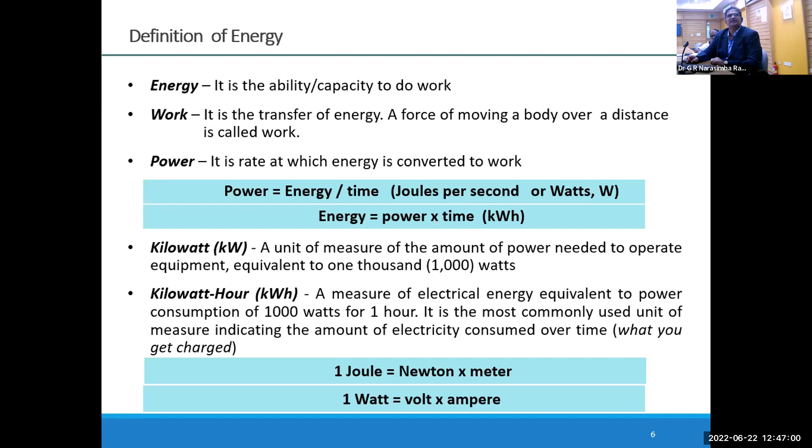And we have forms of energy, where different forms of energy are consumed in daily life. If we categorize them, there is physical energy for doing the work, and thermal energy, which is the heat energy, where fossil fuels are converted to get heat. And we have electrical energy, which is mainly for running the equipment, a very efficient form of energy when it is used.

So physical energy is mainly for doing the daily routine works and physical movement of objects, whereas thermal energy is mainly used for driving vehicles, converting fossil fuels into moving cars and vehicles, and even cooking and water heating, these kinds of applications. And the electrical energy, we have lights, fans, air conditioners, running daily appliances. These are the forms.

And we have different forms of energy based on how they are obtained. Chemical energy, which is released from the chemical bonding of components, either fossil fuels or biomass. And electromagnetic waves, which are naturally available waves, which carry the heat from the sun to the masses. And we have mechanical energy, which is stored in tension and compression in materials, where a simple example is stretching a rubber, which will release the energy stored in that form. And we have electrical energy, which is converted from other materials. And we have thermal energy, from geothermal and solar thermal energies as examples. So these are the different forms of energy which everybody knows.

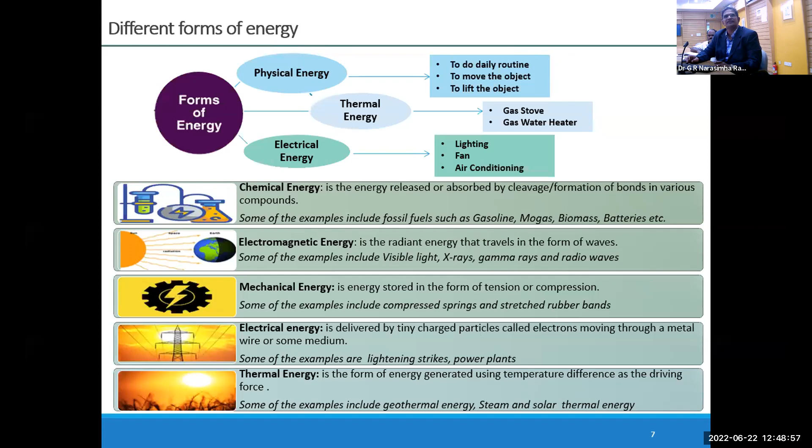Then we have conversion of electrical energy. The main sources of electrical energy are fossil fuels, renewables, geothermal, and even hydro. All forms of energy can be converted into the useful form of electrical energy, which can be transmitted very easily from one place to another, and with the technology we have today, it can be used by the end user in different versions. And the latest one is the EV, electric vehicles, a transportation mode which is considered to be the more efficient and easy way of using electrical energy.

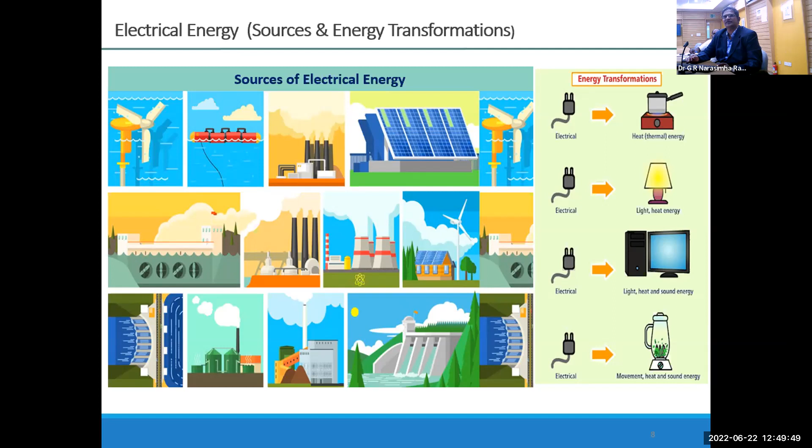So comparing all the forms of energy, electrical energy is a very easy and very efficient way of converting energy to usefulness. So when we look at electrical energy, it will have different components until it reaches the end user. The end user is a home or school or college, whatever you take.

From the generation point, if you are generating the electricity at one particular place as a power plant, either a solar power plant or a thermal power plant, when it is reaching the end user, there are three components of power flowing in the conductors, where the active power is kilowatt, the useful energy.

When beer is poured in a glass or a mug, we can see the active part, but there will be a foam which comes out as a type of inefficiency. It is like a waste, but the foam is a must. Without reactive power, the active power will not come into the picture. So as much as possible, the reactive power should be minimum. Then you can get the best active power in the system. That is nothing but the kilowatt power, the useful energy which we can get.

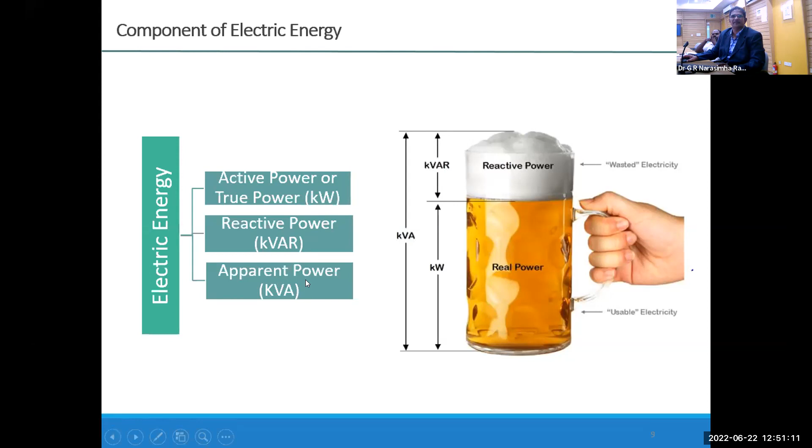At the same time, the combination of both the active power and reactive power is nothing but apparent power, the total power in the system. So when we look at the power rating of the system, the input power and active power for any appliance is used for doing the activity. If you take any product, like a refrigerator or an air conditioner unit, it will have a tag on the product with the rating, the capacity of that equipment, meaning it can draw that much kilowatt of power.

If that equipment has been operated for a period of 1 hour, then we get the energy consumed by that equipment. If it is 1 kilowatt, or 1000 watts, and operated for 1 hour, then it becomes 1 kWh. The 1 kWh of energy consumed by that appliance will be recorded in a meter for the individual equipment, or generally the utility meter at every house, school or college. Our measurement for energy in the electricity bill, or in calculations, should be in kWh: the active power multiplied by the time in hours.

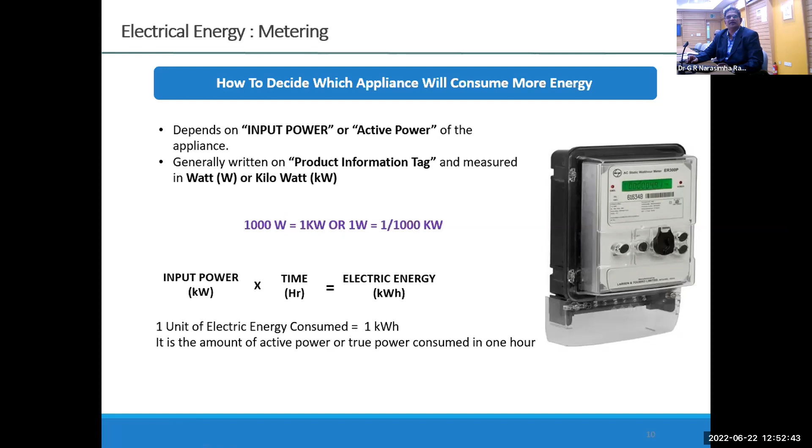Now, what is the difference between energy efficiency and energy conservation? Energy efficiency is using energy to provide a service through any appliance or equipment: how we convert the input power, how much will be the output, and minimizing the loss, which is nothing but high efficiency. Energy conservation is the behavior of people, the type of activity we are doing which consumes less energy.

The basic difference: energy efficiency is an integral part of energy conservation, but energy conservation is a behavioral change. Basically, how our habits are, how we actively do our work, how we choose our appliances and equipment so that they consume less energy, is energy conservation. If you have tube lights in a house or classroom and you turn off the lights when not in use, that is energy conservation, because you actively decided to turn off the lights.

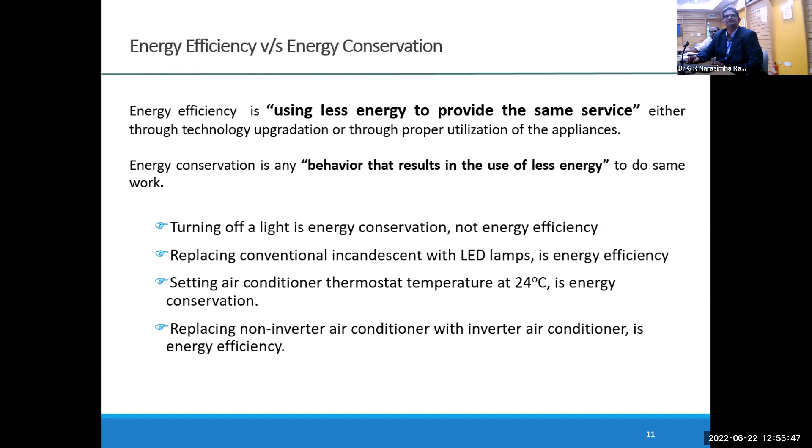The same way, you can see further a few examples where energy efficiency is nothing but technological improvements and advancements in particular products, like high efficiency lamps, LED lamps, and ceiling fans, the latest being available with brushless DC motors, where the savings compared to conventional fans are around 50 to 60%.

And inverter based air conditioning systems, low refrigerant, where high performance air conditioners are available. And in cooking, we have induction technology, where the amount of energy used for cooking any product would be less, but induction technology is an electrical stove. So these are a few technology-wise examples of energy efficiency.

Then we have energy conservation, where the behavior and habits of individuals lead to less energy consumption. Like use of the staircase: even when you have a lift, you are using the staircase for going up and down, that is nothing but energy conservation. And using a bicycle, where human energy is converted for movement from one place to another.

And you have a cooking stove with multiple burners, where you choose the correct size burner for the vessel size, the smaller burner for the smaller vessel. Then you are consuming a smaller amount of LPG gas for cooking. That is energy conservation.

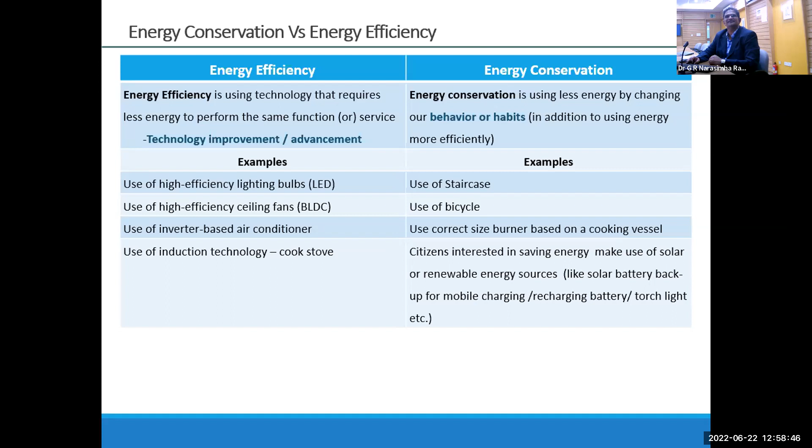So now, in the same tune of energy efficiency and energy conservation, we have different products available in the market. A simple example is the washing machine, where we have front load and top load washing machines. The front load washing machine takes less power and less water, so it is the more efficient one. So you can choose the front load washing machine, which is efficient.

And at the same time, ironing of clothes is something people do every day. If you accumulate all the clothes you have washed for 2 or 3 days or a weekend and iron them at one time, rather than multiple times in small quantities, that is also an energy conservation habit, a behavioral change. So these are simple examples which we come across in our daily life.

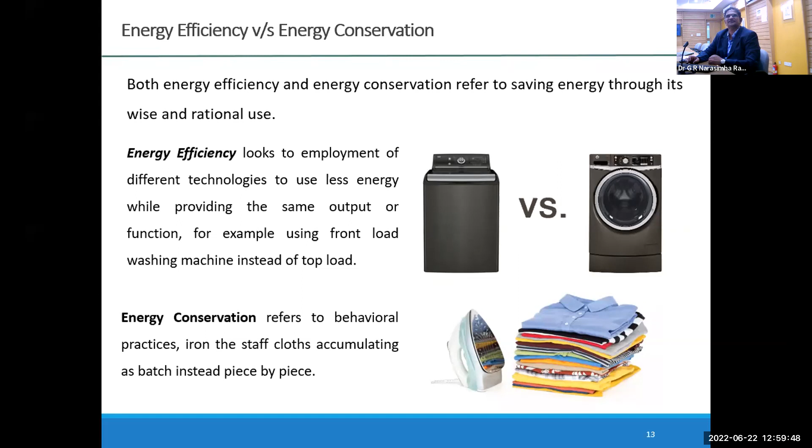So as we have seen, technological intervention, which reduces the amount of energy required for any product or service, is energy efficiency: the same output or service from a smaller amount of energy. And energy conservation is behavioral change, switching off lights and using lower rated power equipment for the same appliance. So as I told, energy efficiency is an integral part of energy conservation.

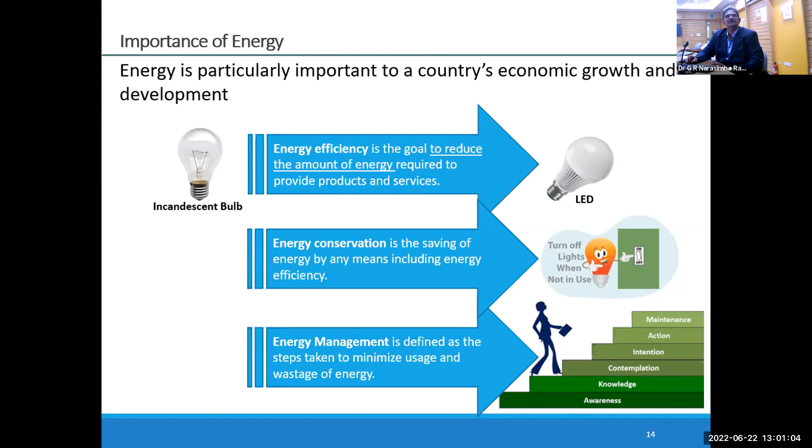Then energy management is a series of steps where you adopt different stages, like maintenance of appliances and equipment at home, the kind of actions we take, and sharing the knowledge we have with other family members and children. All these are part of energy management at each and every level. So these are the three elements: energy management, energy conservation and energy efficiency.

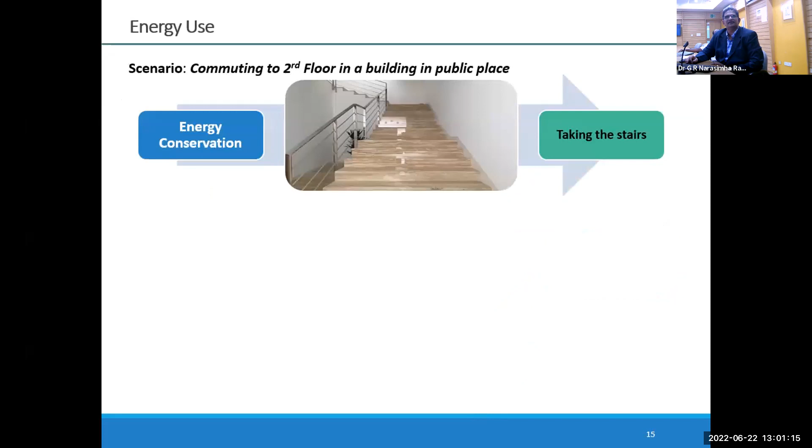Now, another example: if you have a lift and a staircase, as I told, using the staircase is energy conservation. And if, instead of a single person moving in the lift, you wait a minute so that 2 or 3 people, as it has been optimally designed for, use it together, then it is an energy efficient use.

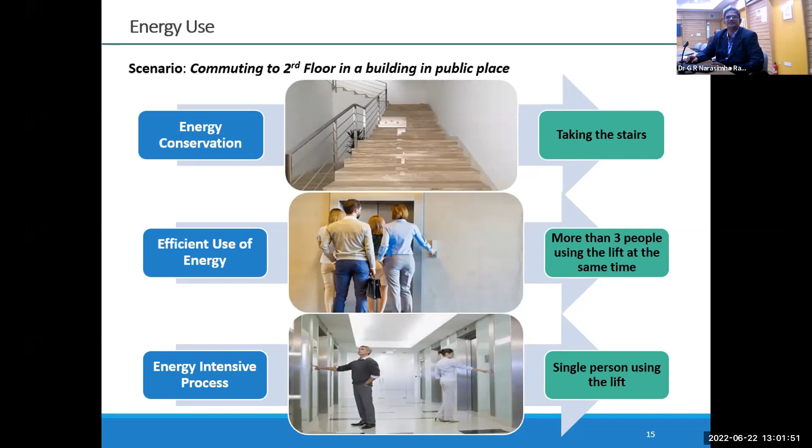Energy intensive means, for instance, if a single person is using a lift for movement, that is an energy intensive process. Same way in transport, if you're using a bicycle for shopping of a small quantity, that is energy conservation.

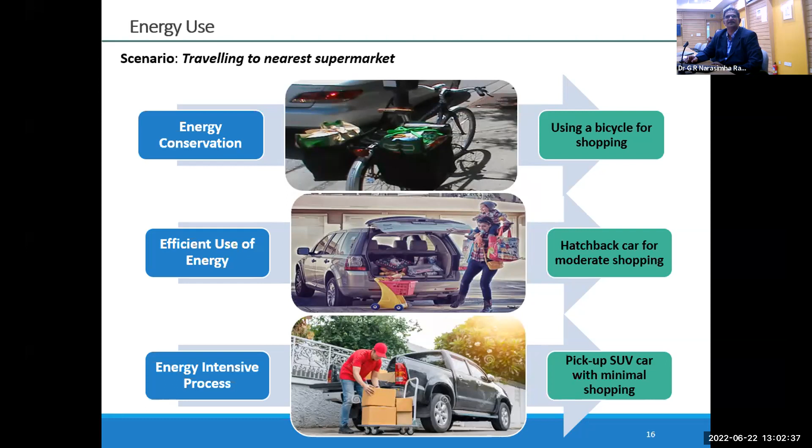So it is based on the availability and the equipment that one can decide whether they want to adopt an efficient method for their activities.

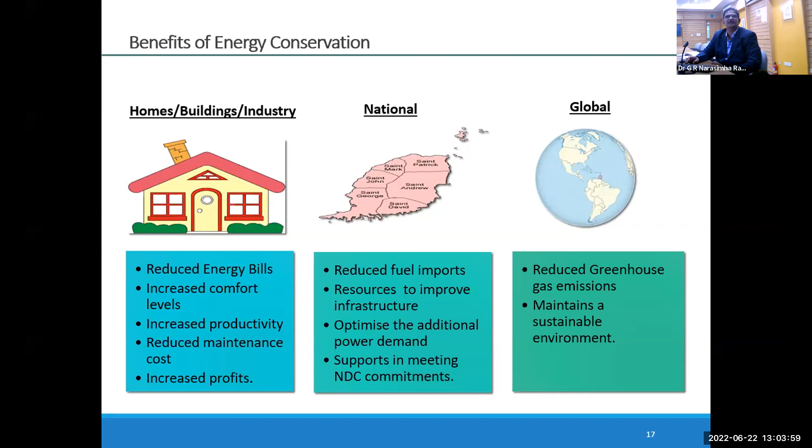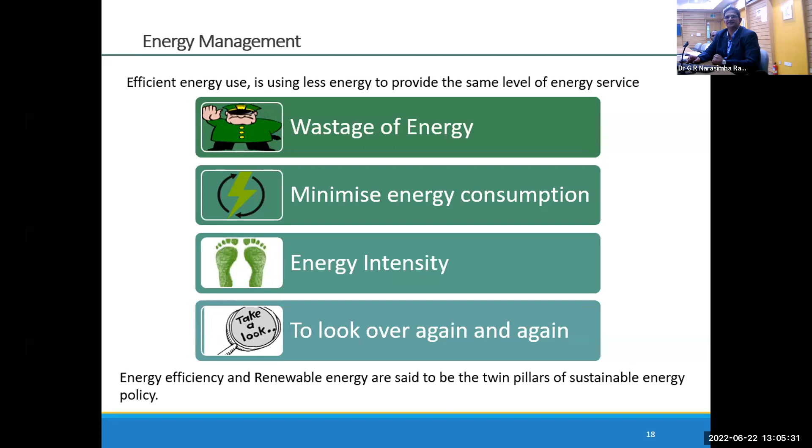Energy efficiency and renewable energy are two different aspects. First is energy efficiency, using minimum energy to the extent possible. Then, renewable energy integration opportunities based on location and type of activities. Renewable energy is more expensive compared to energy efficiency applications and retrofits, but both are two pillars for sustainable energy at any institutional level.

Now coming to the energy audit of a home, there are different steps and methods and components involved. If individuals can understand the methodology and pattern of doing an energy audit, it will be easy for them to perform their own energy assessments for their houses, schools, and colleges.

Primarily, when starting an energy audit, one needs to collect basic information and ask why the energy audit is being done. Then decide what information needs to be collected for that particular building.

For homes, the information needed includes the electricity utility bill, number of people, size of the building, type of facilities, and kind of building. You also collect the base load of appliances, listing all equipment including lights, fans, computers, laptops, TV, and other appliances, along with their rating in kilowatts from the tag or nameplate, or based on the size and model of the equipment.

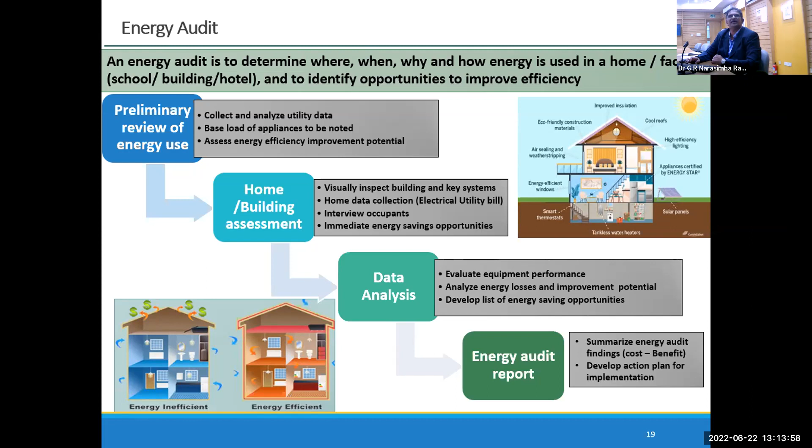Now if we look at a typical energy bill - this is a Grenada energy bill, but most energy bills are similar - you have an energy meter reading of the present month, like March and April, and the difference, for example 2955 minus 2864, giving 91 units over a period of 30 days. You also have cost components like the non-fuel component and fuel component, depending on the total utility fuel bill and amount of energy generated.

They will decide the cost. The non-fuel component is mainly for HR, operation, maintenance, and other costs operated by the utility, divided by the units of generation. Both these costs together become the electricity cost.

In this particular case, it is $75 East Caribbean currency, and it is a very good example.

This particular bill shows the previous 8 months apart from the current bill - they give the previous months' bills in the same bill, showing how many days each bill covers and what the energy consumption is. For example, in January, for 29 days, the consumption was 122 units. So the average varies between 2 to 4 units per day as a monthly average, including holidays and working days. But there is a difference - what could be the probable reasons is something one can even assess.

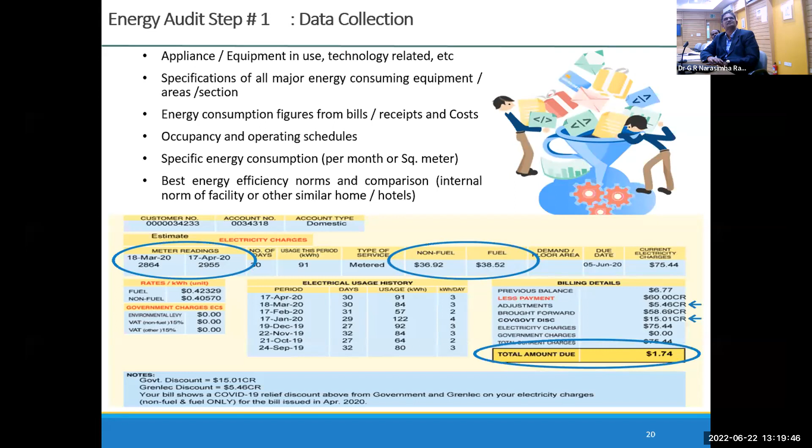So now we have the second step, where after collection of the energy bills and data, we can have a visual inspection where we measure lux using a lux meter. We have different audit instruments for measuring temperatures, sound, dry bulb and wet bulb temperatures, flow meters for water, and speed of equipment like fans. Using these instruments, we collect operating information of a particular building, room, or appliance.

Then we can conduct test and trial runs, for example with air conditioners, where we increase and decrease the temperature and see the power consumption, how much it's taking, whether it's really working, and whether compressors are turning off and on. If the temperature is set at 25 degrees, the compressor should turn off. These kinds of tests can be carried out during the field visit.

Then we need to look into maintenance practices, how equipment is cleaned and how machines are located. A simple example is gas stoves—when using a gas stove, carbon deposits build up. Manufacturers prescribe cleaning every 3 or 6 months. Following that practice ensures burning efficiency stays good for the flame you set.

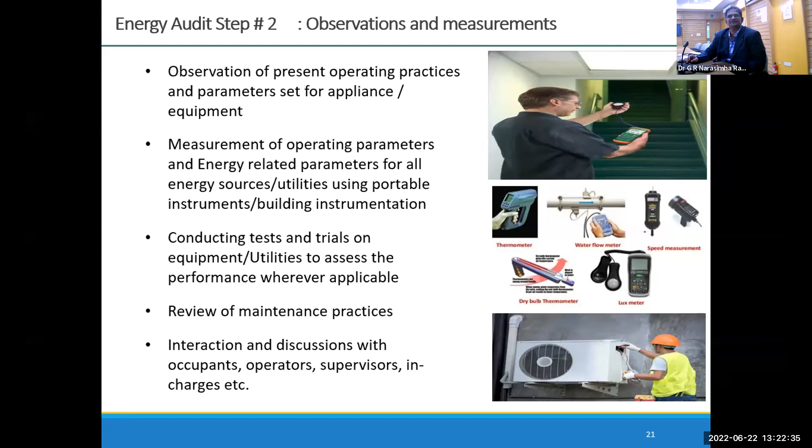Once the data is collected, it needs to be analyzed in a specific manner. If you've collected all the energy bills, you can see the variation in monthly bills, then define section-wise consumption and equipment-wise consumption.

Then you can have a performance assessment—whatever input power is given for a particular appliance, you verify the output against standards and the manufacturer's nameplate. If there are deviations, you need to identify why the deviation happened and what kind of losses are taking place, whether recoverable or non-recoverable. That way one can make an assessment.

Then once the analysis has been done, take a call on the measures, whether the measures can be like changing the operating parameters or loss reduction, by minimizing the airflow rates, adjusting the airflow rates. Those kinds of loss reduction methods can be defined and listed down. Then retrofits: by keeping some kind of a retrofit to control the energy consumption, probably the number of operating hours of the equipment will come down. That assessment and analysis can be done.

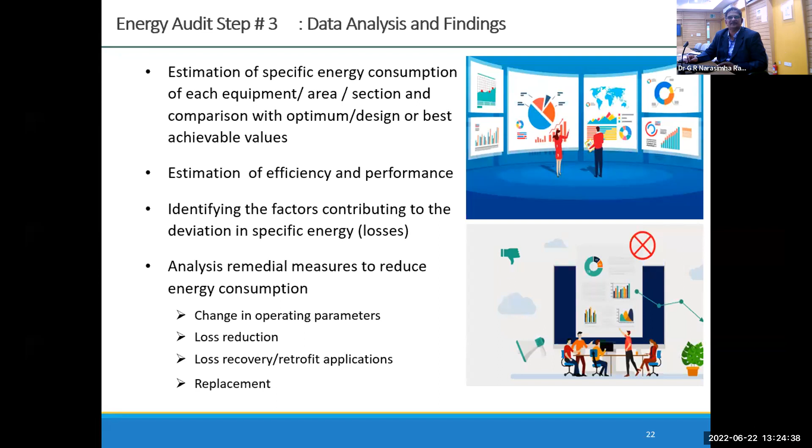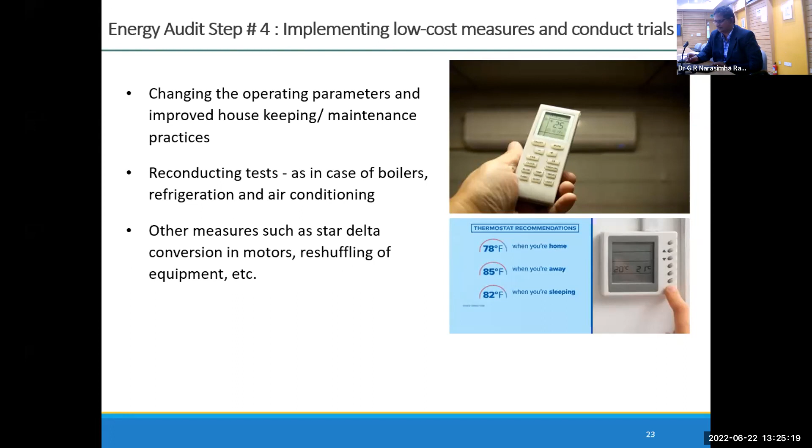Then you can have a change in operating parameters, like a simple one is changing the air conditioner temperatures up and down, increasing and decreasing. Then you can see what real energy consumption is happening by connecting the portable instruments. If the motors are underloaded, then you can have star delta converters, and shifting of equipment based on the loads and other things can be done. And hot water boilers, if they are there, temperature settings can be adjusted to the optimum level. So these are a few measures.

Then once the energy saving measures have been identified, estimate the savings. Assume that you have a water pump where you introduce a level controller, where you are not only saving the energy but minimizing the water consumption: when the tank level has been reached, the pump automatically gets switched off. If the level controller is not there, the pump is operated till the water spills over, then you will hear the noise or something, and only then will you go and switch it off manually. So that is the water wastage.

When you are doing the energy savings, you may also be minimizing indirect material losses, material wastages and other things. So that also can be taken. Then estimate the cost savings due to the energy saving, the productivity improvements and the material loss reductions. All put together, you can assess the cost savings. Then estimate the investment required for the intervention, so that the investment will pay you back with an attractive payback period. Once you know the investment cost and the operational cost savings, we can calculate the payback period and the return on investment.

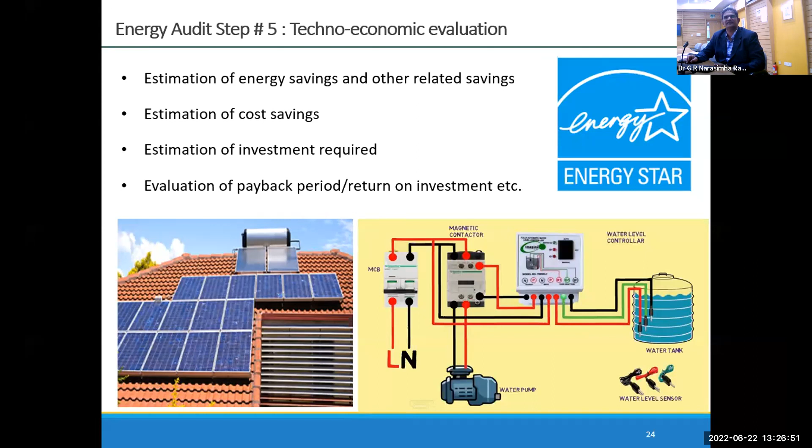Now, after performing all the steps, report making is one. Before report making, you can categorize the total energy saving measures based on the time period and recovery as short-term, medium-term, and long-term measures. And you need to identify the equipment suppliers for each of the measures, whether they can visit your home or office. Then they can suggest which measures are implementable and which are not, based on the structure of the building or roof of the building, various conditions and preconditions. Then you can decide which measures can be taken up, and allocate the budget for implementation of the measures.

So in any place, the best method is first to identify the operational change and the behavioral change, the minimum energy one can consume while doing all the operations in the building. So energy conservation is the first step when you are taking up an energy conservation study or energy audit. Once your energy conservation measures have been listed down, you can look into the opportunities for technological change, where high efficiency equipment can be integrated, where with the minimum energy you will get more output and meet the energy demand inside the building.

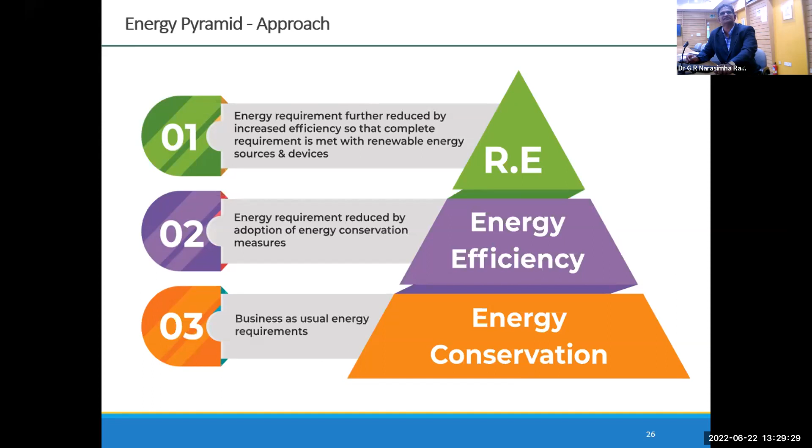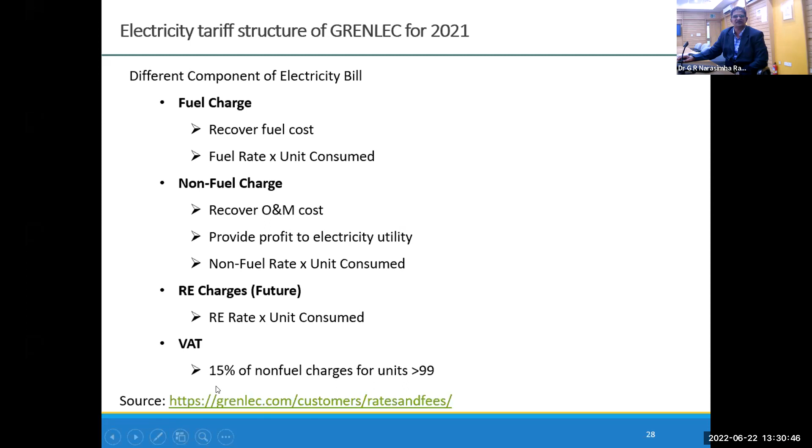So here, once the fuel cost is there, multiplied by the units of energy consumed by that particular end user house, you will get the cost towards the fuel charge and non-fuel charge. Then RE charge. If the utility has set up a new investment in RE, renewable energy, solar energy, there will be a charge for that also. On the total units consumed, some small RE charge will be there. And there is VAT, which is a value added tax on the non-fuel charge units. Fuel has no additional cost towards the taxes.

Now we have variation in the energy bill. When can it happen? If the number of people in the house is more, utilizing the electrical appliances more in terms of quantity or usage over a long period. Instead of using the TV for 1 hour, if a good movie is there and you use it for 2 hours, then definitely the energy consumption of that equipment will be more. Increasing the number of activities due to special occasions, festivals, carnival, where a lot of people are coming together, then the energy consumption in that particular period will be high.

The faulty installation of equipment can lead to the burning of the equipment, and poor installation affects consumption as well. If you are using a mixie that has not been installed on a plane plank but on an inclined plane, it's a faulty installation where it can tip over, or water will spill into the electrical parts, then short circuit. Those kinds of things also sometimes lead to higher energy consumption.

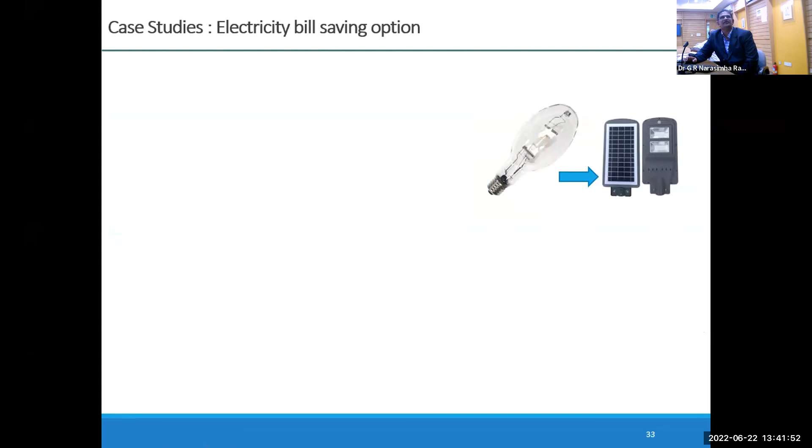Now you can see the previous slide where we have a total electricity bill, which is calculated with the fuel charge and non-fuel charge multiplied by the number of units. We have the fuel charge multiplied by units, and the non-fuel charge multiplied by units. VAT is nothing but 15% of the non-fuel charge for a monthly consumption of above 99 units. If the units are above 99, only then will the VAT apply.

So here our initial consumption, when we were using the metal halide lamp, was above 99, 122.8 units. So the VAT has been applied and it has become 112. But when we replaced these outdoor lights with the solar lights, our energy consumption is below 99, at 98.8. So now if you can see the calculation, we only have a fuel charge and non-fuel charge. The VAT has become 0. There is no taxation below 99.

In most countries there will be slabs, below 50 units, below 100 units, certain categorizations where taxes and other rebates will be provided by the government, so with minimum energy consumption for a house, you will get lower tariff benefits. So in this particular case, the VAT is not applicable for unit consumption below 99.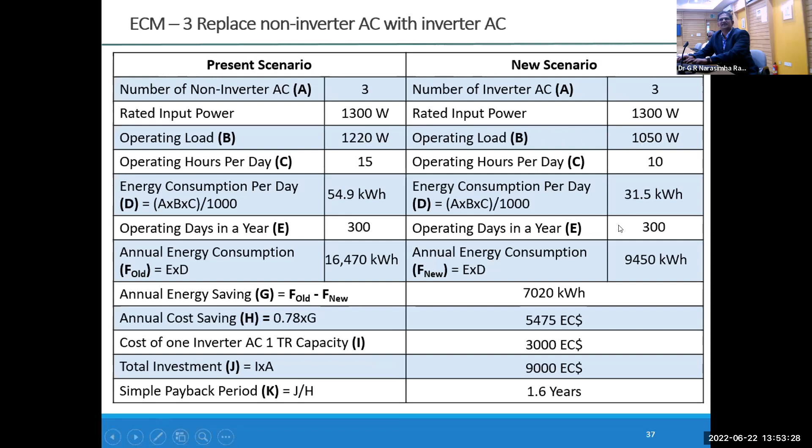So here, if you can see, the operating hours are less with the high efficiency inverter, and the actual load draw is also slightly lower than the conventional non-inverter based AC. These are the 2 parameters resulting in the reduction in energy consumption.

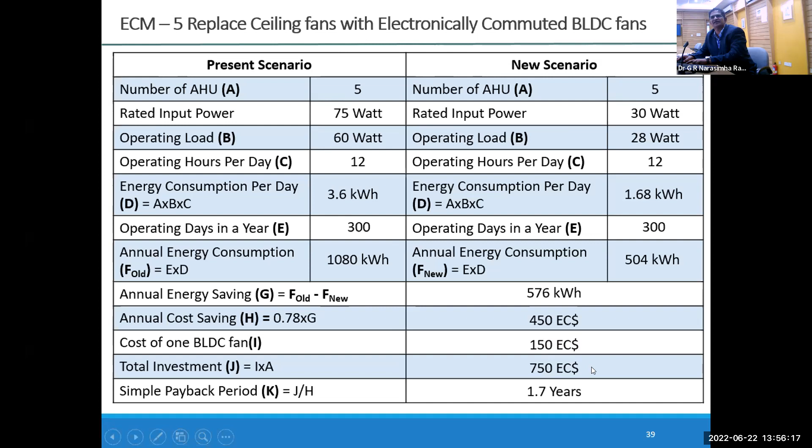So once you have assessed the payback periods, you can draw an action plan with short-term measures where the payback period is less than 1 year, and, where there is higher investment, measures where the payback period is less than 2 years. You can categorize them into different measures. Then based on budget availability and priority, you can draw up the plan. So these are some examples of the calculations.

So any questions, anything to be answered? Then I will go to two simple questions on what we have done today. You can answer; I will give half a minute for each question. You can put it in your chat box also.

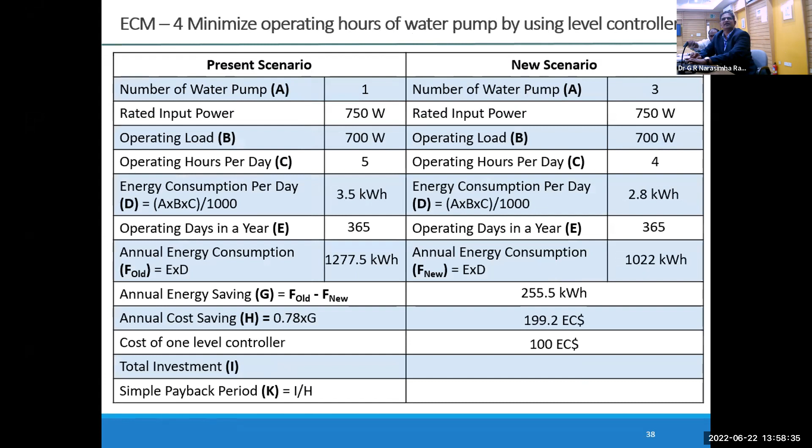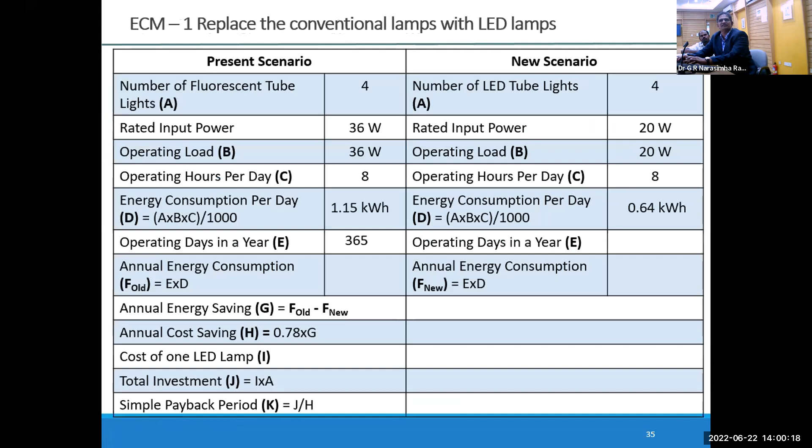If possible, I have one question. Yeah. Thank you, Mr. Narasimha. Yeah.

The electricity cost rate is based on a flat tariff. But if we have another tariff model, rising with different categories, what's the solution for that? Yeah, you can take the average cost. For a particular month, take the total bill amount divided by the units, then you get the cost for that month. If you want to fine-tune further, take the average of the last 12 months: add them up and divide by 12. Yes. Thank you.

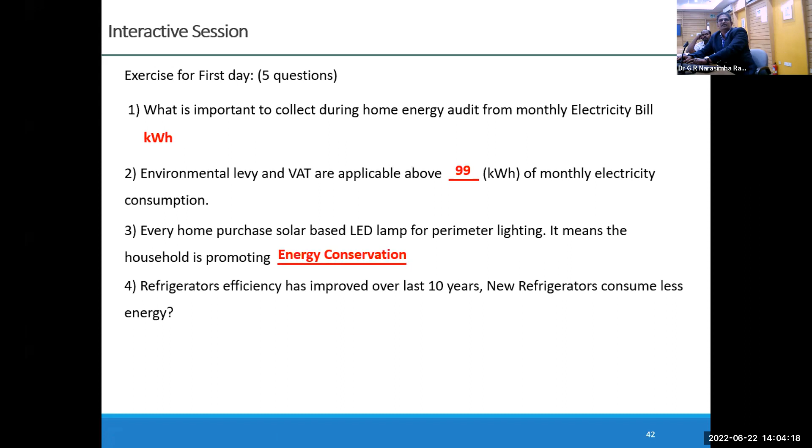Then assume you have a refrigerator, very common in your home, an old 10-year-old refrigerator. If you go for a new refrigerator, does it consume less energy or more? What is your view? Less energy. Yes, because over the last decade refrigerator energy consumption has come down by almost 30 to 40%.

Then, does a home energy audit need discussion with the family members? Is it required or not? Yes. So these are simple questions based on today's interactive session.